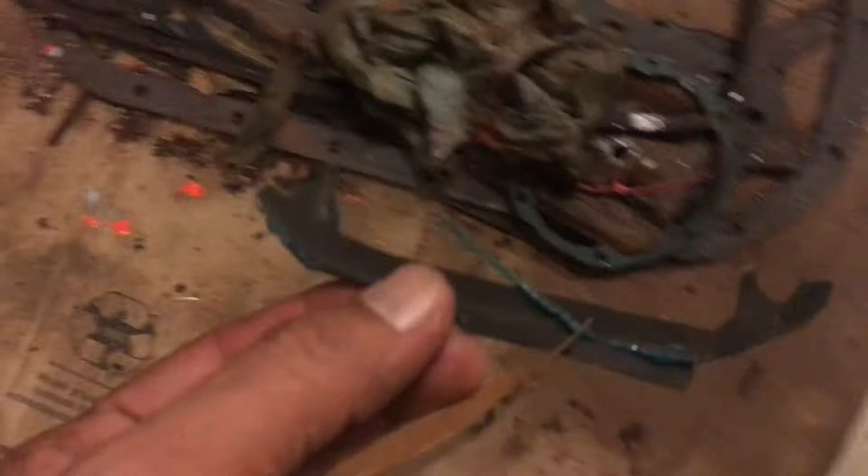But I did make a gasket when installing this side attached to the block. I made this gasket because when I removed it, I found that it has... Alright, so this is the old gasket, came out of it. So I know there was a gasket, so I built one.

I did not have it in my kit, and the gasket paper I used was the thickness for the specs, I would say this way, is, come on, 1/64 inch. That's how thick this paper is. So don't forget to make a gasket for this part when you attach the hydraulic pump with the block. That's all.

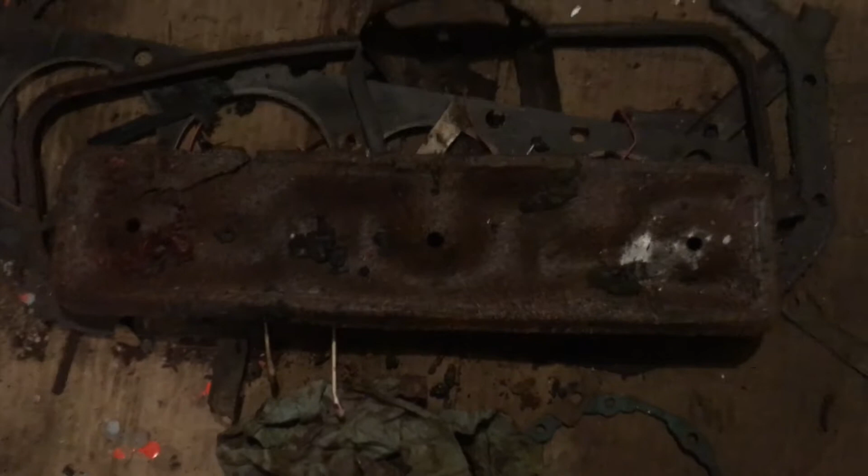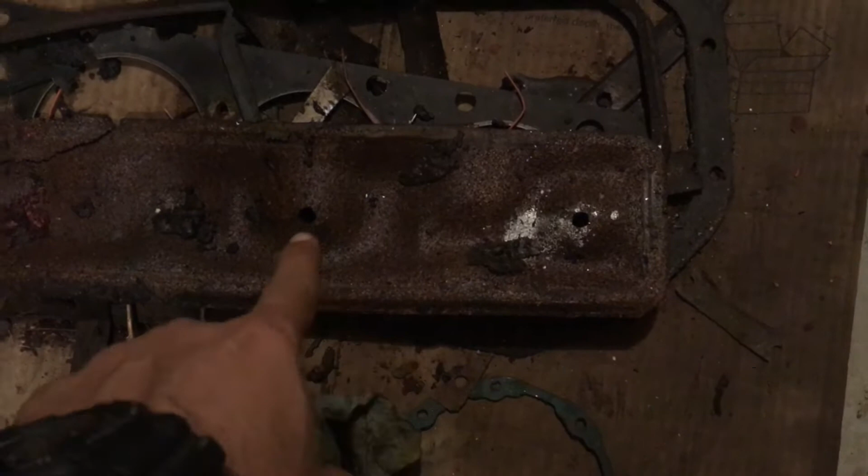Just want to show you this side valve cover gasket, this long rectangular shape. This is the old one I removed, and it doesn't have a pocket, a rectangular opening on this gasket, but the one I received in my gasket kit does have one somewhere here, a small rectangular opening. So I'm not sure what it is for, but that's the difference.

Today I also added 4 new bolts. These bolts, I'm going to show you. This light is not enough. But this one, let me see if it focuses.

So this one connects this bell plate, or the rear end plate, which is in the middle of the engine block and the gearbox. This bolt holds this plate together, and also there is one on top right here.

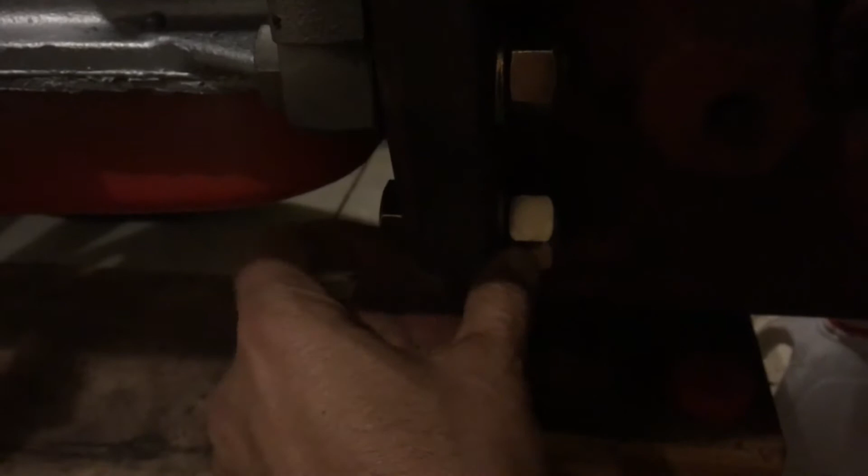So this one is 5/8. I could not find 16, so I installed 5/8/11, 2-inch long, with a split washer and a nut. The hole for this bolt is good for 5/8. However, the bottom one is also 2-inch long, but it is 3/4 inch thick, because the hole in the bottom is 3/4 wide. So it still has a little wiggle room, but do not install 5/8 here.

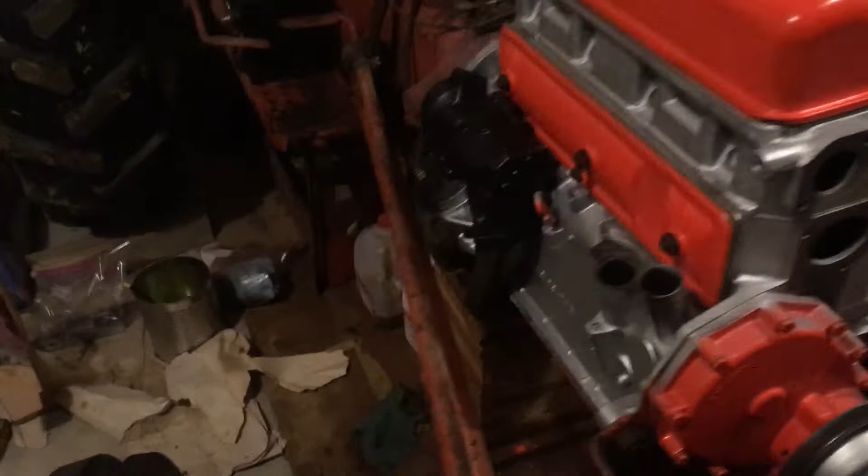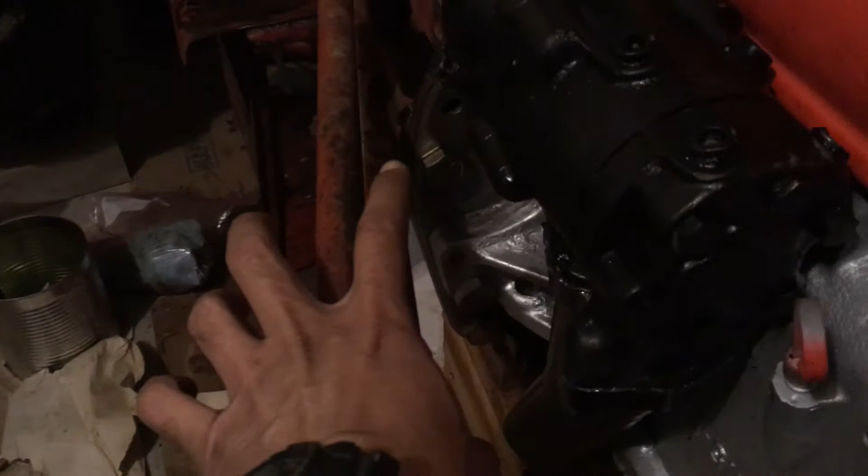And the same thing is done, 2 more bolts on this left side. So all together this engine block is connected with the gearbox with, how many, number 1, 2 and 3 bolts, big bolts on one side and 3 on the other side, and there are 2 more on top.

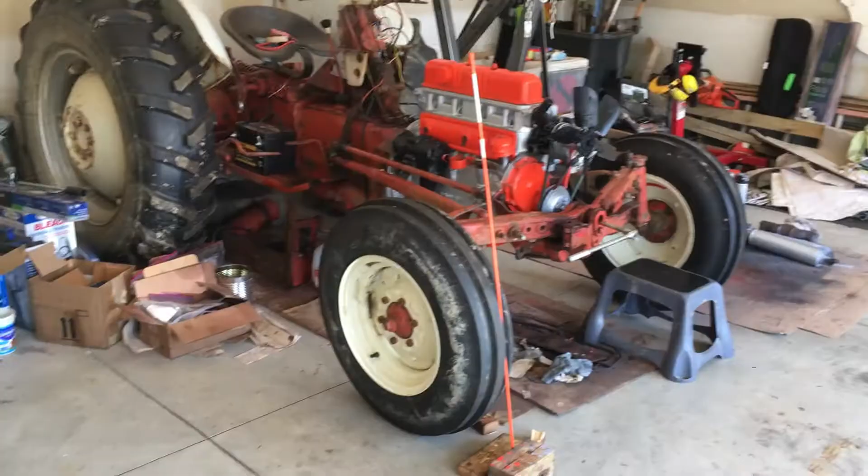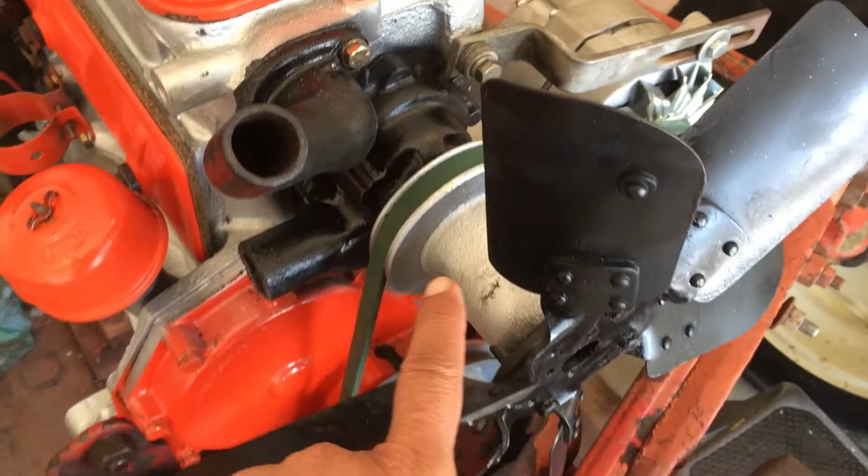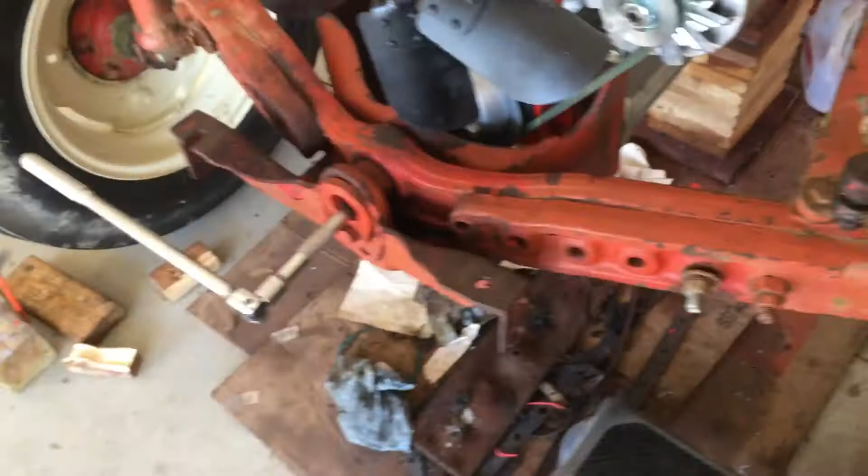Hello everyone. Last time I did install the water pump and return for coolant, these two accessories I installed. Also I installed the alternator, since this engine was already converted into 12 volt.

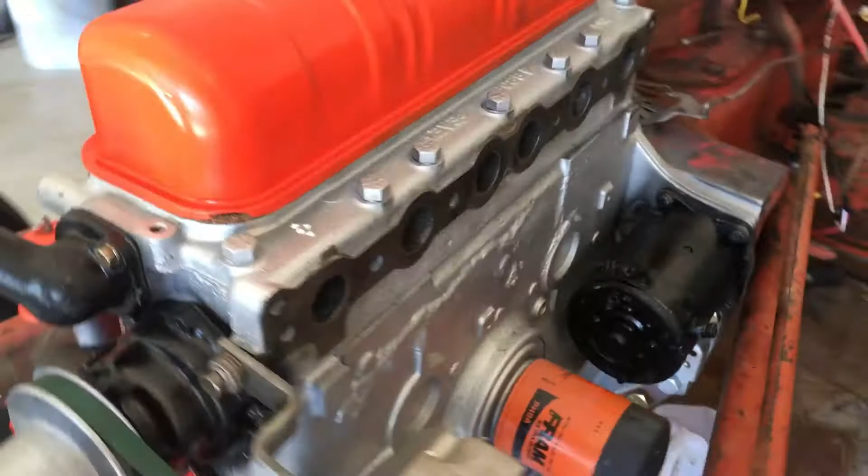I did tighten the bolts, those bolts, this one, and on the other side also. I did install the coil retainer. I installed the breather, the blow-by breather, I believe I would say, and I did not install the plugs yet.

The reason is I have to rotate the engine to match the timing when I'm going to install the distributor. The distributor is not installed.

The radiator right now is sitting outside, and this needs to be serviced, repaired, because now everything is good, new, but the radiator is not. I don't want the gasket to go bad, so I will either have it repaired if it's cheaper, or spend some money and buy a new replacement one.

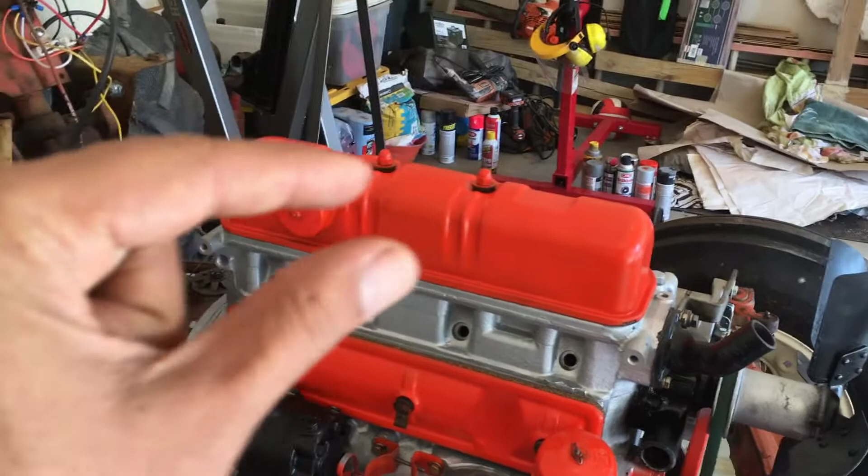This is it. Also, what I need to do is the tappet valve clearance. I need to adjust it, I did not adjust it yet. The cover is just sitting over here to protect it from dirt. So this is the last thing I need to do.

I'm going to show you in the next video when I do the clearance adjustment. The adjuster bolt is not the one which comes with a nut and bolt that you can adjust the clearance with a screwdriver and loosen the nut. This is a self adjuster, one piece bolt, very tight, and I was expecting the nut and bolt setup. So I'll show you what is the difference for this engine. That's why I did not do the clearance adjustment before.

I found out it is a little different. It comes in two different adjuster nut configurations, I believe. So the one I have is different. So some few things I found that are different for this engine than I have seen in other YouTube videos for the repair of a similar engine.

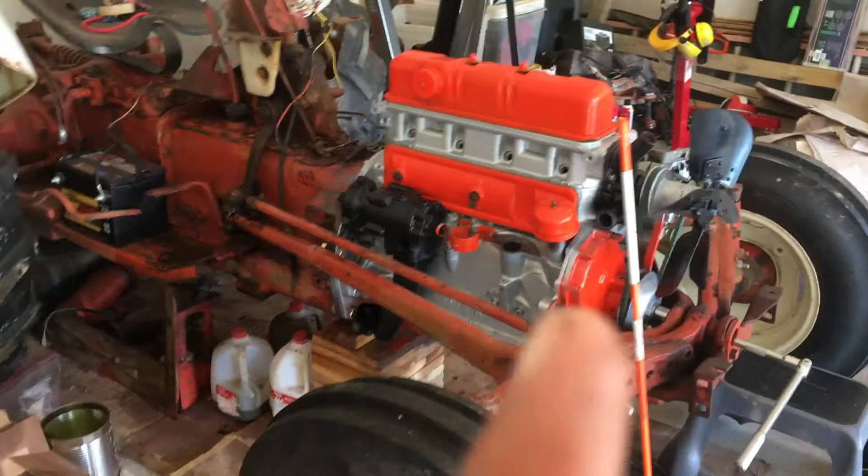600, and this is 640, Ford 640. It was built, I believe, between 1955 and 1957. However, the earlier model may have different, or the later model - I found, like for the 2000 series engine, one of the YouTube videos I saw, it has a similar tappet clearance bolt. So I will show you in my next video, but this is why I'm waiting.

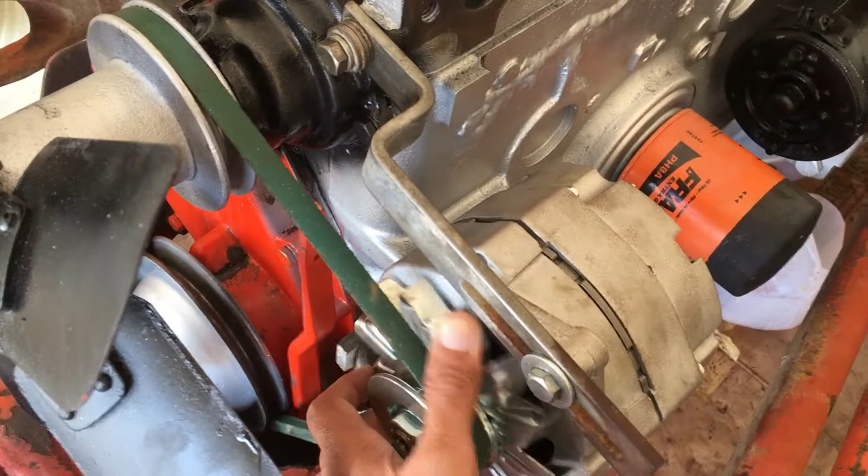I think everything is ready. Also, one more thing I want to tell you is, when you install an alternator or do the conversion, even after conversion, there are some alternators which come with a different fan.

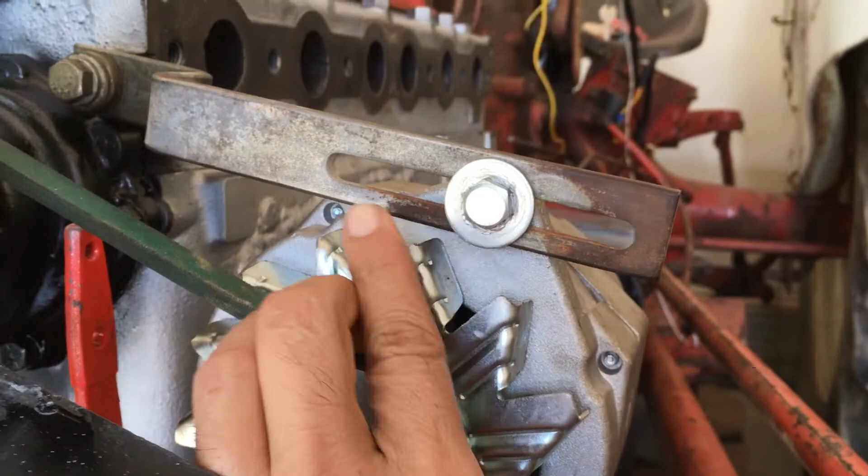This one is different, and because of the difference, if you see the distance between this fan and this adjustment brace - if you have a wrong size belt, shorter or longer diameter or circumference, you may not have enough clearance, so it's going to touch this.

So one belt I ordered with other accessories that is a little longer, maybe half an inch. It did not work. This one I eyeballed with a lot of back and forth visits to the tractor shop, and this is the one I found and replaced.

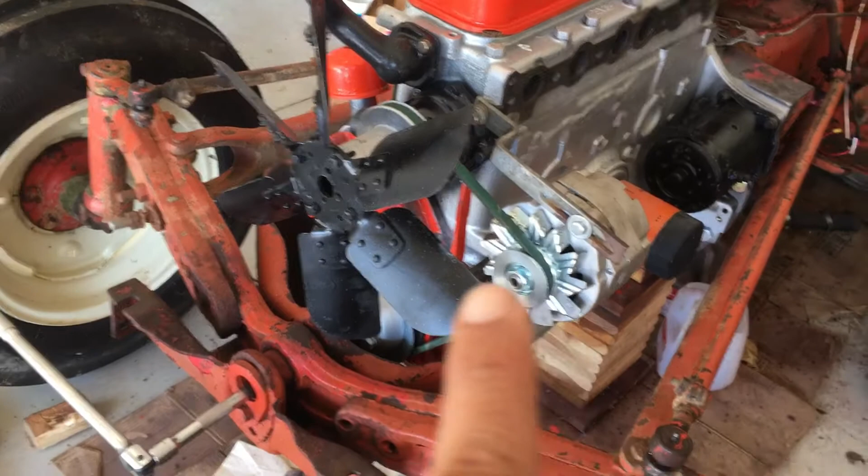So you have to be careful when you are upgrading or changing the alternator. Make sure the fan configuration is aligned with what the length of the belt is. This is something that needs to be figured out beforehand, because not every belt will work with these alternators. The one I have is a little shorter, maybe half an inch to three quarters. So that's why it is like this.

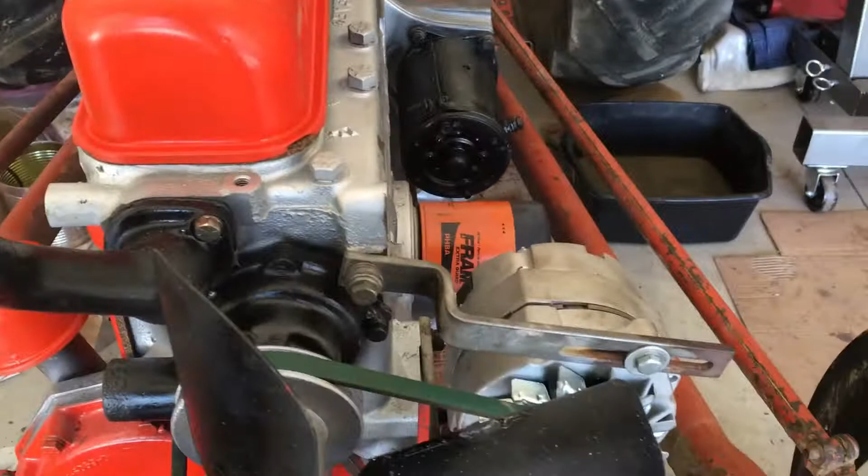What else? When I installed the fan and water pump, I tried to clean it up inside with rust remover and all those things. I did the painting, if you see it's painted now, but it may need another repair. I'm not sure it has a bearing inside or not, but I felt there is some kind of light noise. I just want to make it work first, and then I will worry about other further things later.

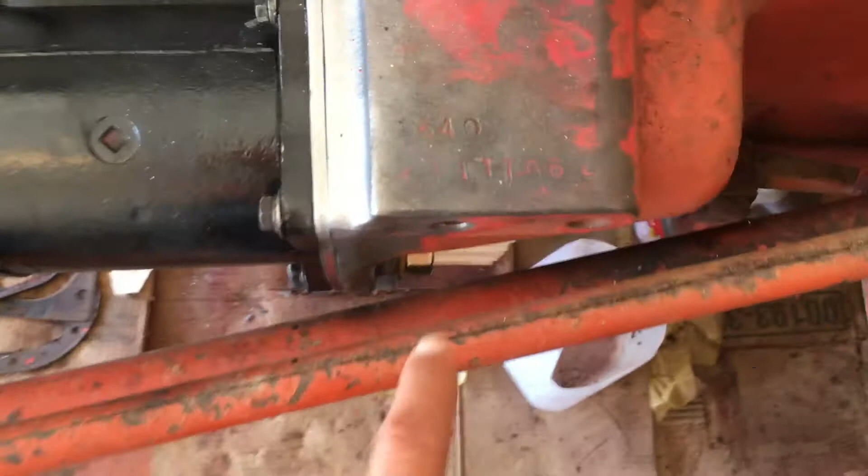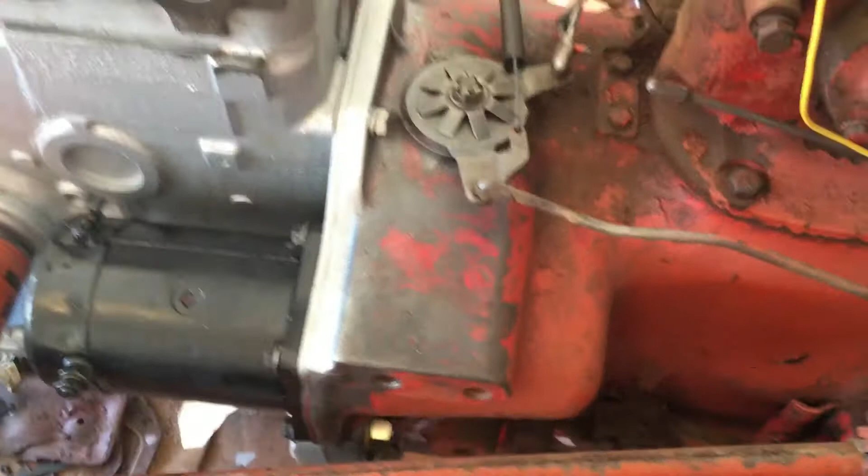So this one I'm showing you, the 640, and 111766 diamond - it starts, the number starts always like diamond, 111766 diamond 640. And since I'm not the first owner for sure, I may suspect if someone upgraded, they can leave the engine block like this, but the rear part is coming from another model, a similar model.

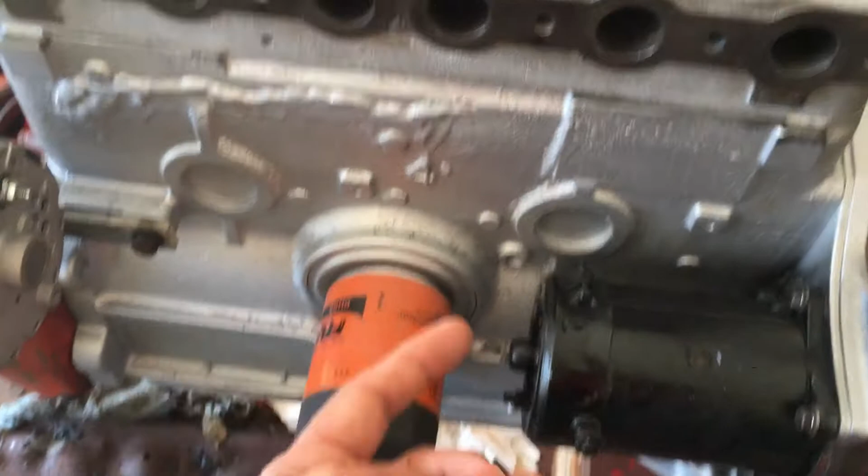So I do not trust it fully when you own a very old engine which has changed several hands of ownership. But I think I'm okay. So this is 640, and these are different serial numbers - it has 6085 35H, so maybe someone has changed the head, may have changed the block, may have changed the gearbox, or may have changed the rear end part, which is basically the axle. So many things can happen, but I'm okay with what I have.

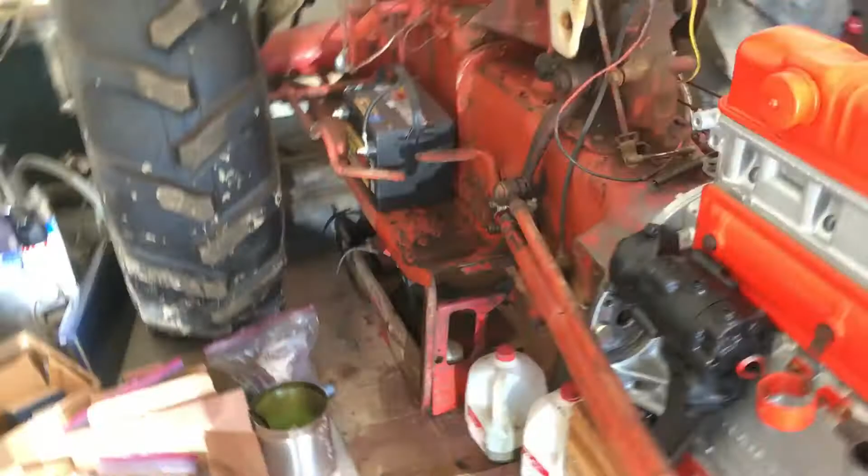So today I'm planning to install the manifold, and the gasket I have is this, from my gasket kit. This gasket has two sides, and it needs to be installed on the correct side.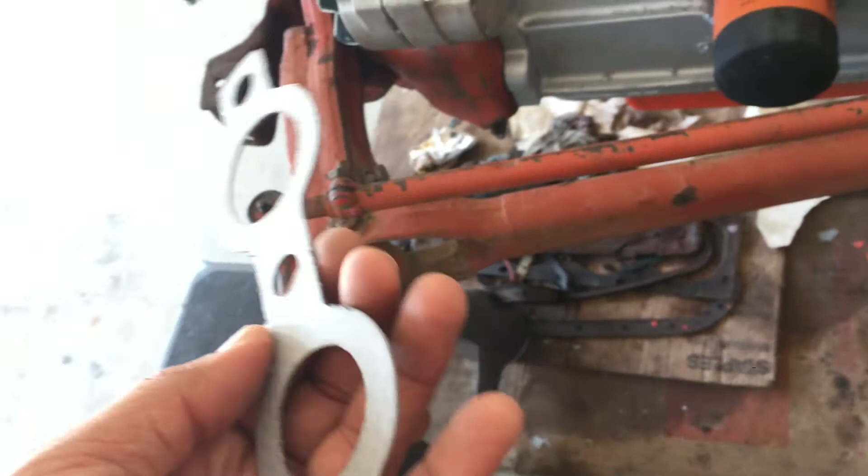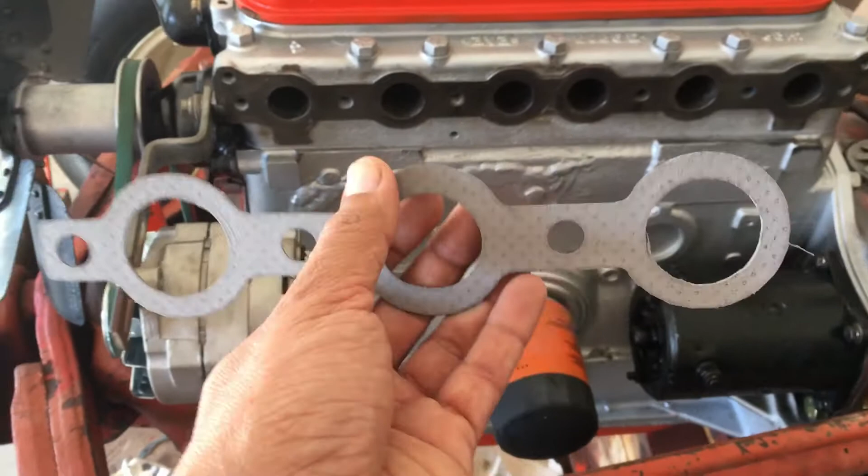The smooth side will go towards the block with the smooth surface, and the bumpy side will go towards the manifold. That's the orientation I found from one more video on YouTube on how to install this gasket. So that's what it is.

Before doing that, as I do with other things, whenever I find these holes to install studs or bolts, I use the kit I have to clear these holes. I cleared the threads with a tap and die kit. I bought it from Harbor Freight, and so far it's working perfect for me. It has so many pieces in it, and that's the one I use.

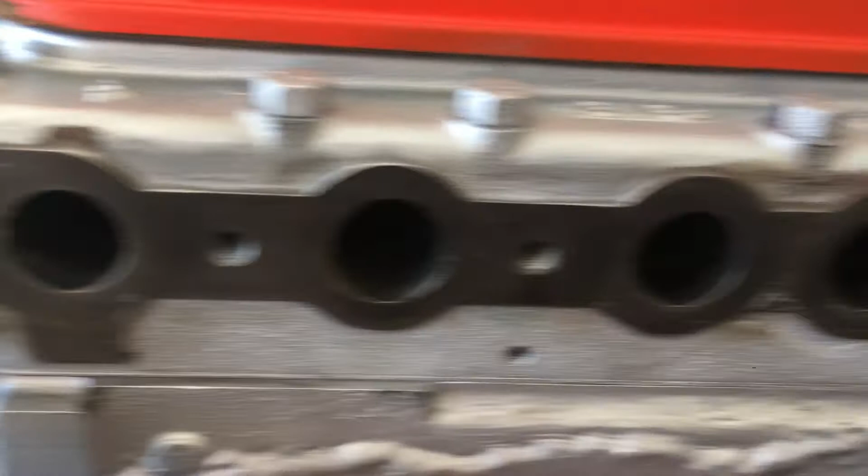So as I'm going to install different parts, I'm making sure wherever, at least for those holes where I need to torque to the spec, it's clean, out of paint or debris or any other grime, so I can torque it to the spec.

So all these studs need to be installed. I have them separately from before sending it to the machine shop. I'm going to install those first, and then I will install the manifold.

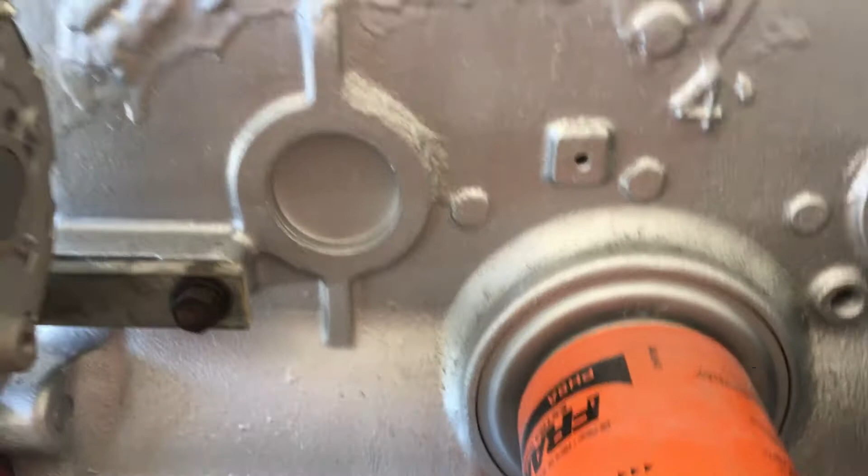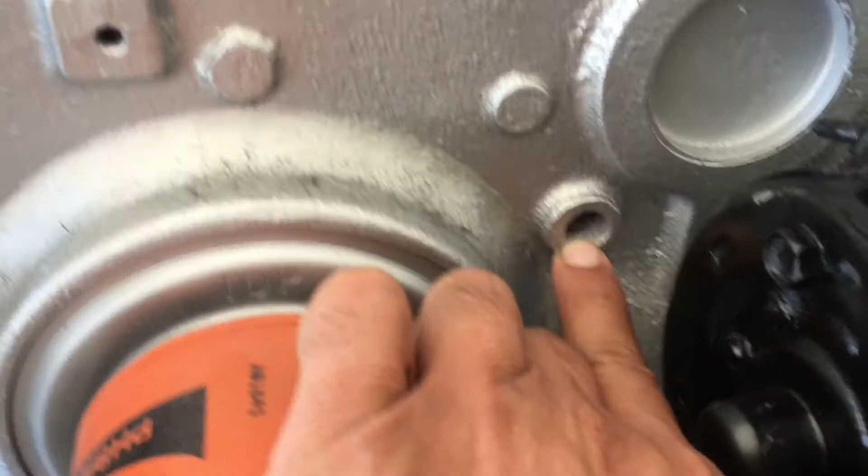Also, here something else will go. I have to see the older videos to remember what that was. I don't remember - I have to see what needs to be there. Maybe just a plug or something else. There's another threaded hole, something needs to be installed there. I will check what it is.

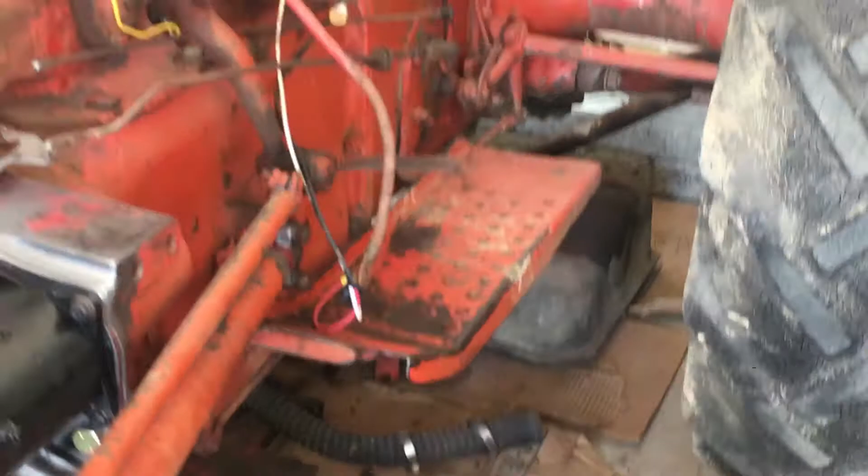What else? I'm also thinking, if you see under the tractor, I have the fuel tank. I'm going to flush the tank, and I will see if I can install a flexible hose fuel line instead of this hard copper line, so I can make the distance shorter and maybe it's easier for later repairs. This hard line was very difficult to handle when I was disassembling it.

Also, I need to check one place. This hole is for the temperature gauge sensor that needs to be installed and connected with the gauge.

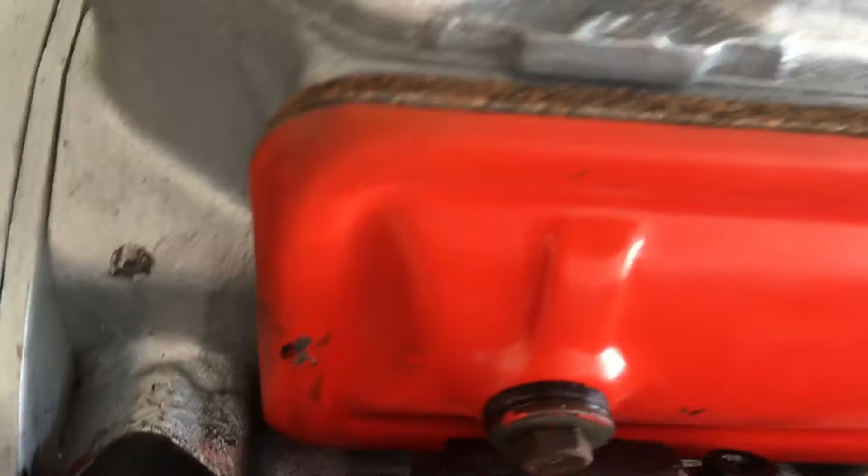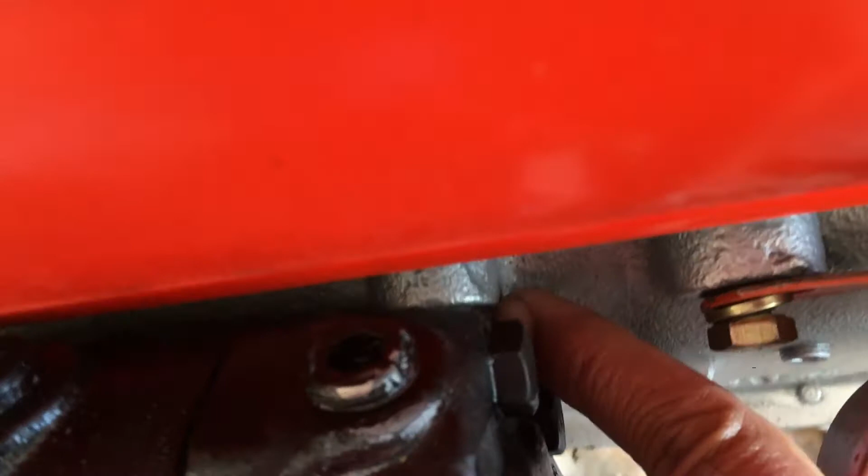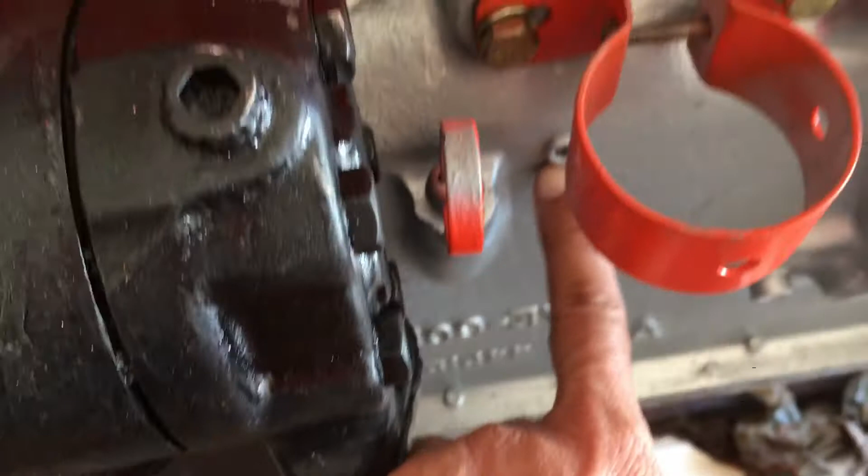I think there's one more place where an L-shaped fitting goes. So if you see this, there is one plug, and there is another plug, and there's another plug, there's another plug.

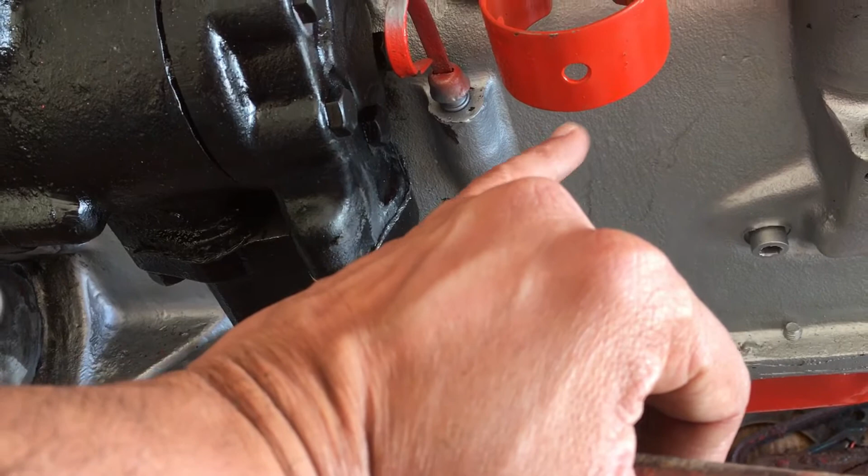So I think I need to find out where the oil pressure gauge will be installed. I know there was one L-type plug or connector. I have to check - so these are things I left for later.

This one I know is a cover for the timing marks hole or inspection hole. That needs to be installed.

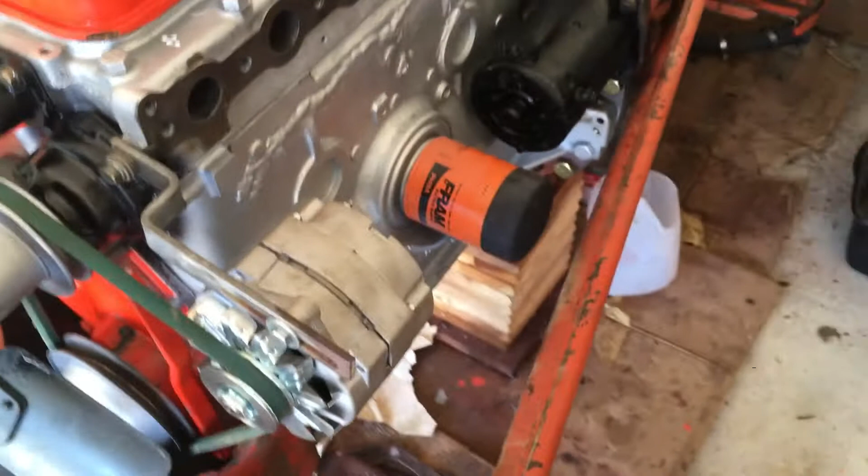The distributor I will do later at the end, because what I'm planning is to put a hex key inside, use a drill machine, and fill the oil pan with oil, then circulate that oil with the drill machine into the entire engine without starting it. I'll run the oil filter for a couple of days, filled with oil, so the filter will be soaked with oil, making it easier to prime the oil pump since it's already soaked. That's my theory. I'm not going to run the engine the same day, so at least I'll let it soak and circulate the oil everywhere in the engine. I should be able to see the oil coming up all the way to the valve assembly on top - I'll inspect it. So the idea is to circulate the oil everywhere without starting the engine.

I'm going to put back the rear if it's not stopping me from doing the remaining steps. So anything I can do on this side, I'll put it back together.

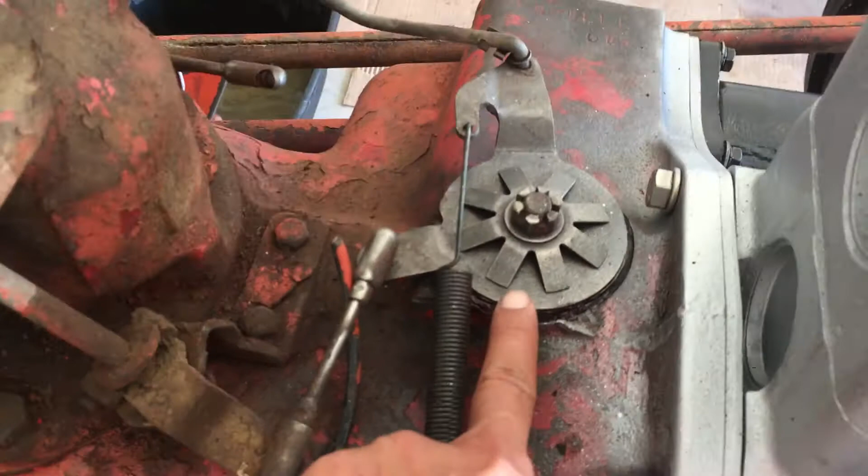I know when I was cleaning up this friction disc for the throttle, I put some grease under this plate so it's easier to twist. But later I found out this is a friction disc - it's not supposed to move freely. So I will check what the purpose is.

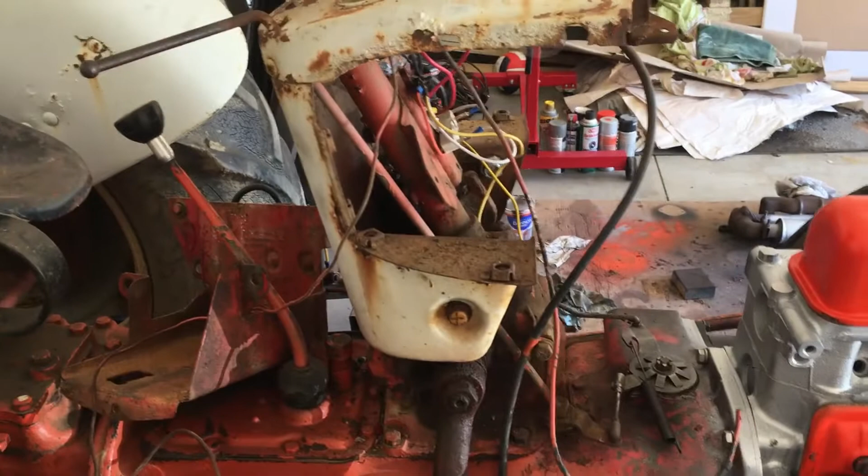So I have to unassemble it and wipe off the excess grease so it's not moving too freely. What I'm thinking is, if you see this, the whole thing moves freely - it was too tight before. I believe it should not be too tight, and it should not be too free - it should be medium, so with the touch of a finger I should be able to adjust the throttle in different positions with very small steps. That's the idea.

So yeah, these are several things I have in mind. Before I proceed to put it back together, I'm going to follow these steps. Otherwise it's coming along slowly - there's a lot of chores besides this project.

It needs to be left clean, so I don't want to get it dirty. That's all, folks.

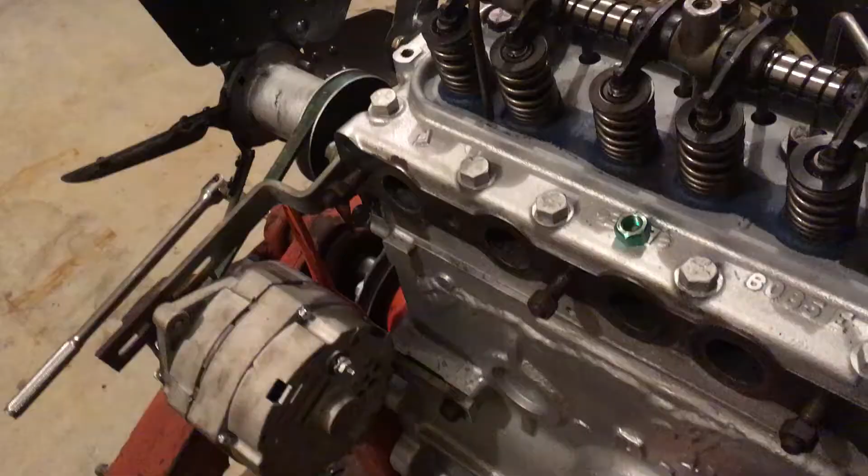Hello everyone. Today I'm going to install the intake exhaust manifold on this side, and that needs to be installed on these studs 1, 2, 3, 4, 5 and 6.

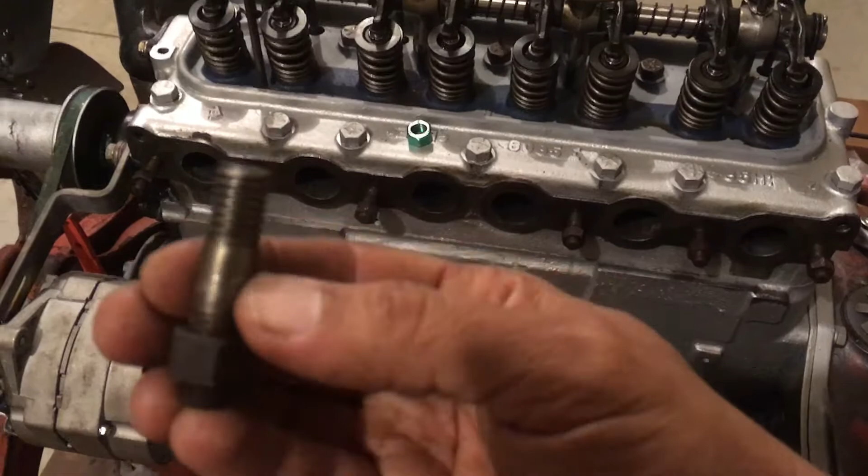These studs are dual-sided, meaning they have threads on both sides, with a neck in the middle part. I don't know the technical term - a flat side, non-threaded. There are 6 of these studs.

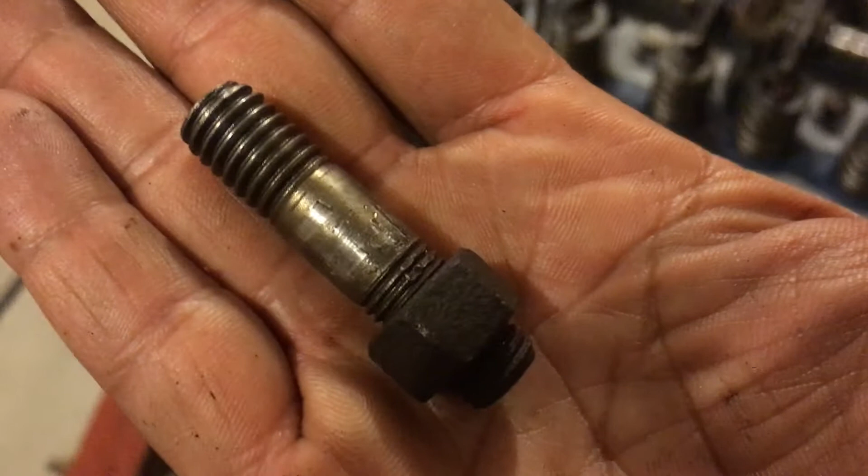Let me zoom in. On my finger side, this is 7/16 14, and the nut side is 7/16 20 pitch for the threads. The 7/16 20 will be outside, and this side will be inside the head.

However, this needs to be installed. These don't need to be really tight - all they do is hold the manifold. All you need to do is torque it to 20 foot-pound to the head, which is not too much. I'm not sure I did it exactly right, but that's what I'm doing. All 4 of these - 1, 2, 3 and 4 - are torqued to 20 foot-pound, and these 2 are remaining.

I'm going to show you how to install these, in case you don't already know. These are not regular bolts, these are studs, and I'll show how to install them and torque them. The method I'm going to use is the double nut.

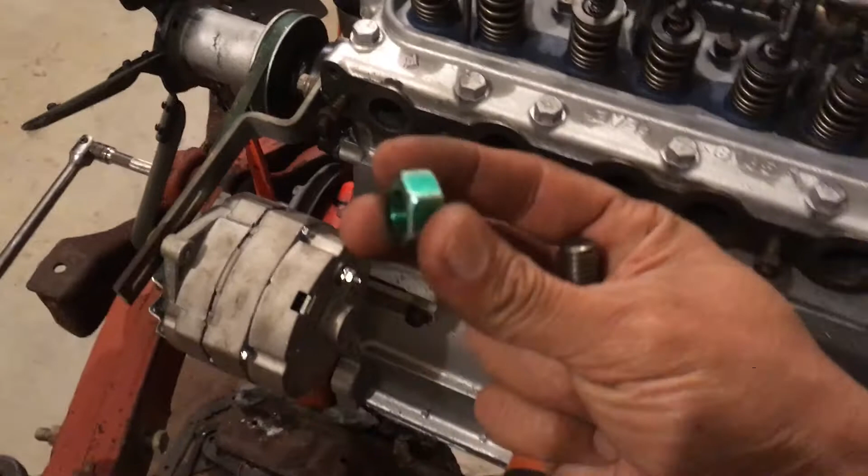I have this spare nut, a grade 5, bought just for this 7/16 20 thread. I'm going to use this double nut - install the additional nut as a head for the bolt, tighten it with the specs, then loosen it and remove it so they can stay.

Let me try how I'm doing it. Hope that will help. I don't know. I hope it will do the justice.

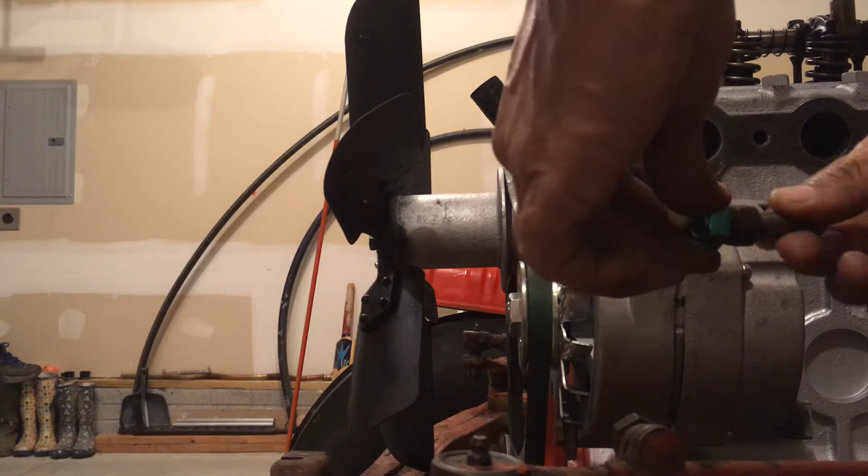Alright, now I'm focusing. I'm going to install this nut on this side, hand tight, just to start the thread. I have not used any grease.

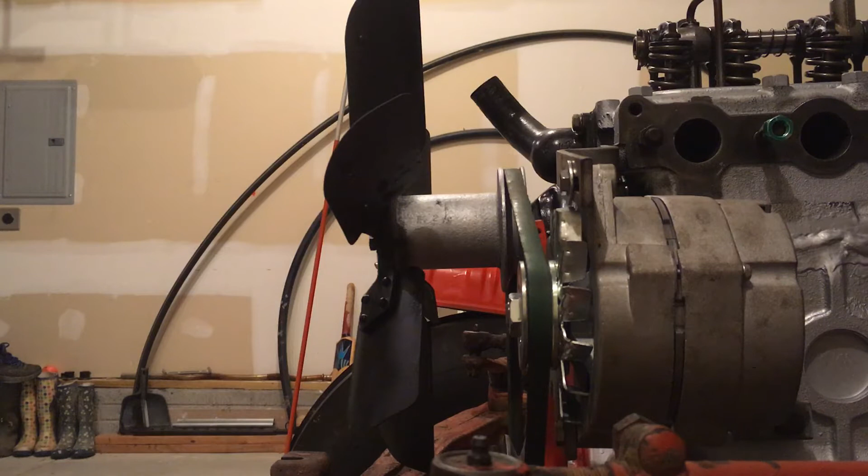I forgot, I should be using anti-seize on this stud. I have not used it, so let's see. But anyway, this is how you're going to do it - the first nut, which is the original nut, needs to go all the way.

And I'm going to install the second nut on top of it, and then... okay, I don't know how it's going to go. Let me see if something can hold this for me.

I'm trying to focus it. This thing is very stubborn. Come on, stay, puppy.

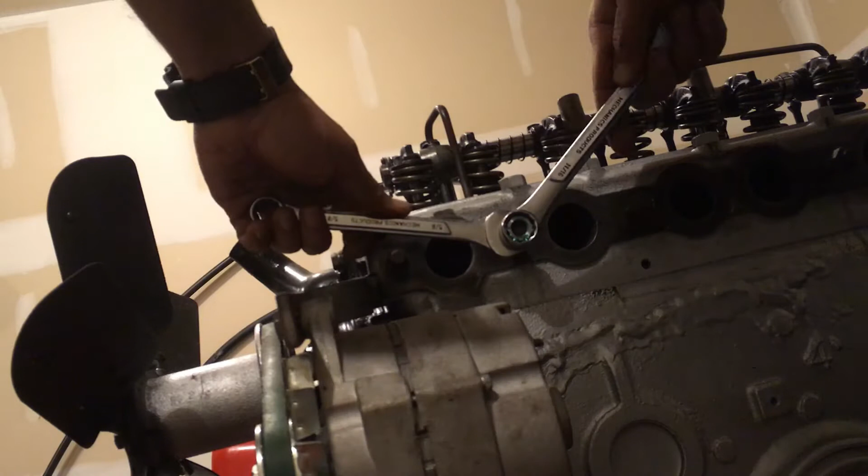Alright, so one is the inside one. I'm going to back it up, loosen it, and the outer one I'm going to tighten, so like this and like this. I think it's good enough.

Now I'm going to use this ratchet just to tighten it enough. Once it cannot go anymore, I'll use the torque bar - now I don't see the thread anymore from the front, the stud is already inside the head.

Now I'm getting resistance, so I'm going to use the torque bar to tighten it to 20 foot-pound. This is how I'm going to do it. This is not a very expensive bar, and I am not getting 20. I will see what I did.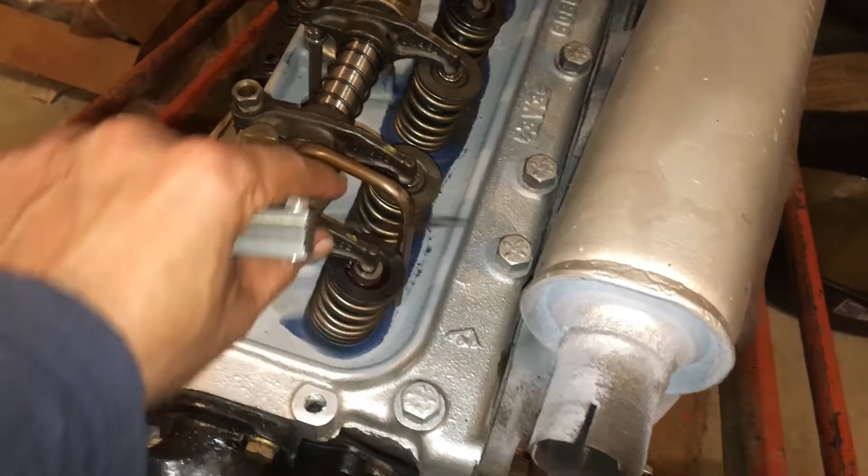Hello folks, as you can see I'm back to the tractor, and today after installing the manifold on the head, I am about to set the clearance for the rocker arm assembly - the clearance between each rocker arm and the valve stem where it meets the valve. I'm going to use this feeler gauge, and according to the spec this has to be 0.015.

0.015, or 0.38 mm. There's a clearance for both intake and exhaust valve. And if you don't remember which is which - I'm holding a manual and a couple of other things - let me tell you. When you haven't disassembled it, you can identify by the extra metal cap between the rocker and the valve. This steel cap is only on the exhaust valve. The extreme right and left ones have this metal cap. The intake ones don't have this. So 4 intake, 4 exhaust - 2 exhaust in the middle, one on the left, one on the right, and between those we have 2 intake and 2 intake.

Before shooting this video, I was actually trying to adjust it on my own - I should have read the manual first. Somewhere on YouTube it says, set the flywheel marking to 0. This means cylinder 1 is in combustion cycle, so both valves will be closed all the way, and I was just doing it without paying attention. But after struggling, because as soon as I fixed one and rotated, I saw a different clearance on the previous one, I knew something was wrong.

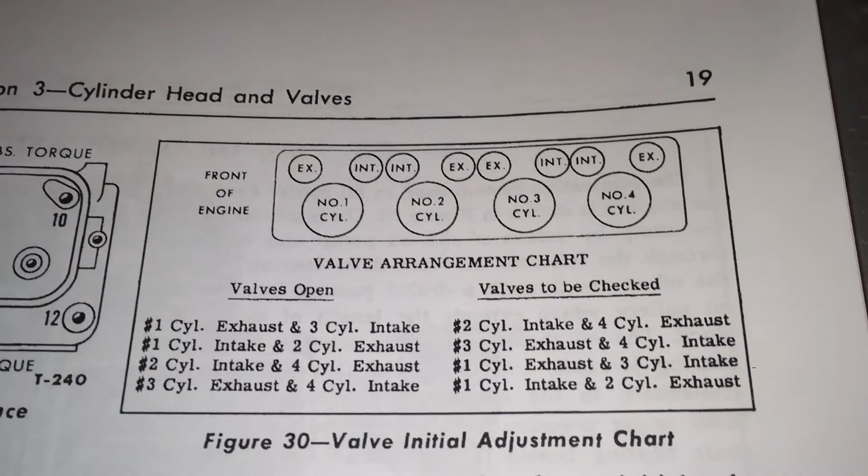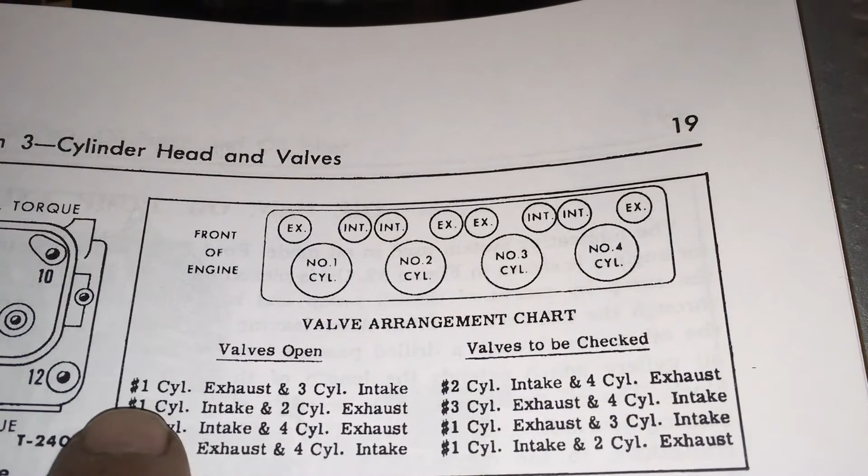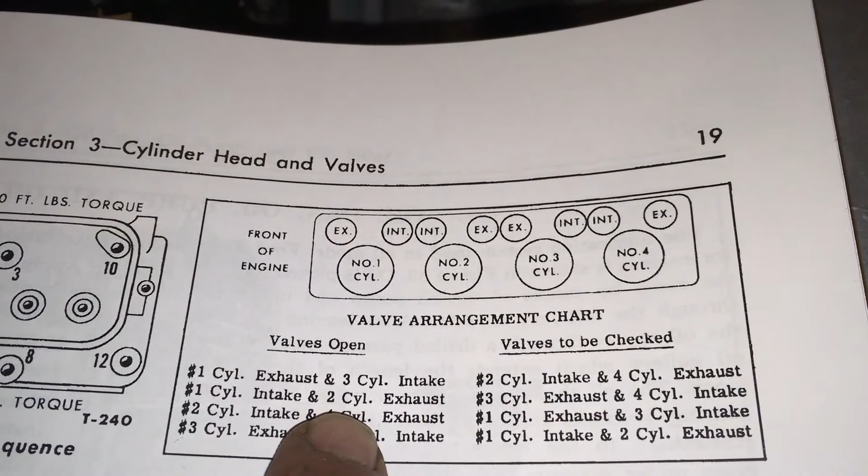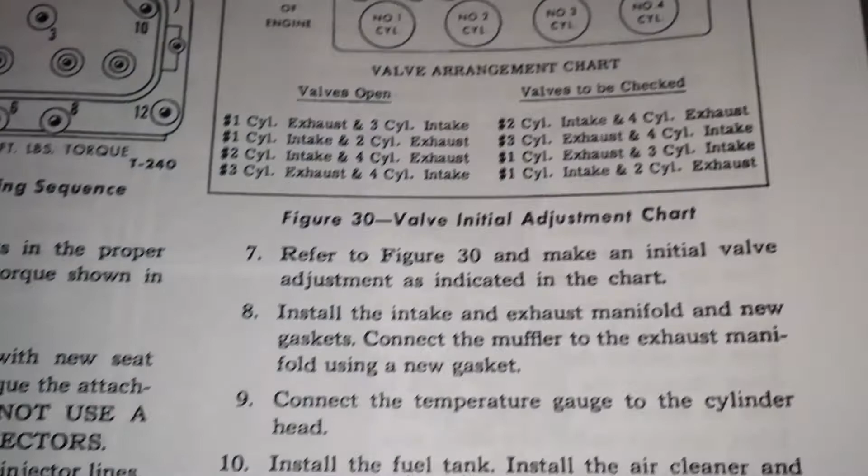I can set number 1 cylinder exhaust and number 3 intake. Then I'll go number 1 cylinder intake and 2 exhaust, 2 intake, 4 exhaust, 3 exhaust, 4 intake. That's how valve open will work - number 1 will be open. So that's the chart you have to follow, and the instruction says refer to figure 30 and make an initial valve adjustment as indicated in the chart.

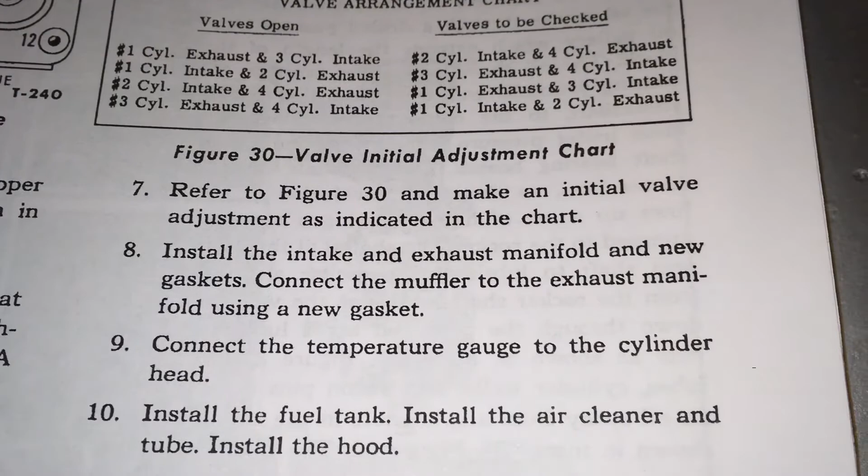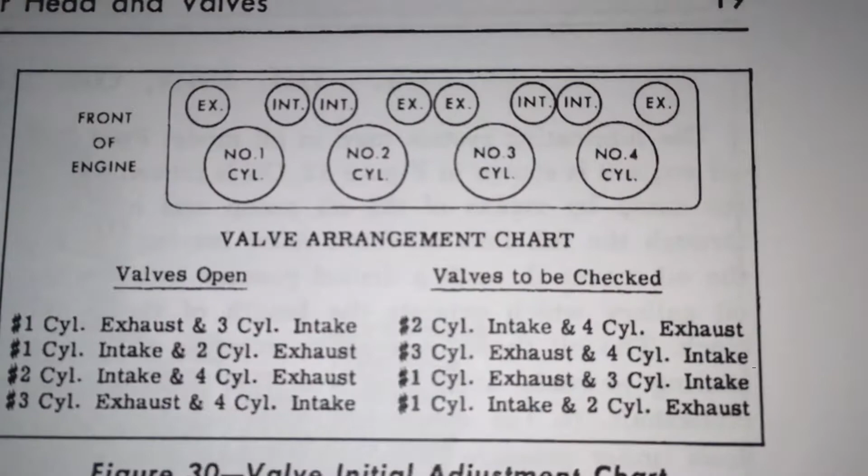Install the intake and exhaust manifold with a new gasket, blah blah blah. So make sure you take a snapshot of this - I'll try to include it in my video. That's also the torque spec for the head bolts. Alright, so I'm going to follow this, and once I'm done I'll make the next video. Bye.